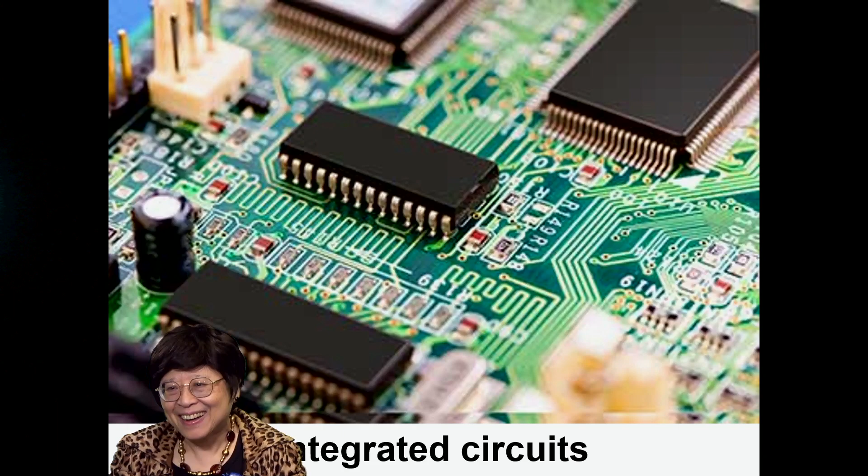Not my plan, and I got interested in integrated circuits. I studied under Professor Carver Mead, the father of integrated circuits. Really cutting-edge education, because back in '72, he was already teaching us how to make and design integrated circuits.

However, I did some research under Professor Pol Duwez, the father of amorphous metals. That's in materials science, and that really got me very excited about research, which is the pushing of the frontier of knowledge. Materials in particular constitute the foundation of any technology, whether electronics, aerospace, and so on. Also, materials mark the history of human civilization: Stone Age, Bronze Age, Iron Age, and so on.

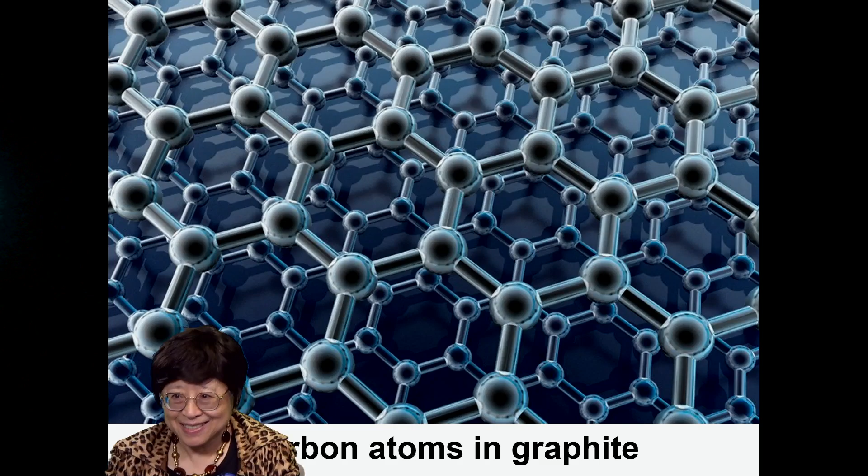After graduation from Caltech, I went on to MIT for my graduate studies, also a very good school. And there I fell in love with graphite, beautiful structure and beautiful physics. I chose to study that under Professor Mildred Dresselhaus, a very prominent carbon scientist.

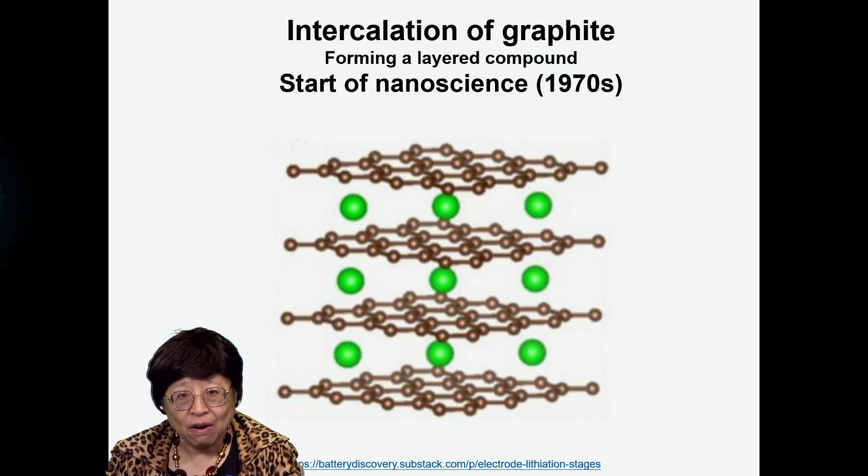She and I studied the intercalation of graphite, that is, converting graphite to a metal. That was actually the start of nanoscience back in the 1970s. I did research in this field for about 15 years. However, I saw my field declining because the applications did not quite work out at the time.

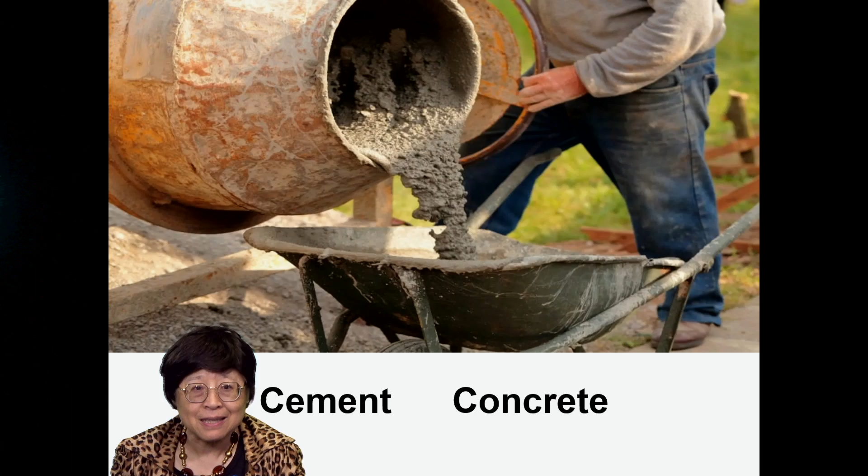I was still very young, so I decided to leave my field of expertise. That forced me to think out of the box and leave my comfort zone. Somehow I got interested in cement or concrete, though I've never mixed it or studied it before.

With my background in electronic properties of materials, I added some short carbon fiber, which is conductive, into concrete, and thus I invented smart concrete. Smart concrete is self-sensing.

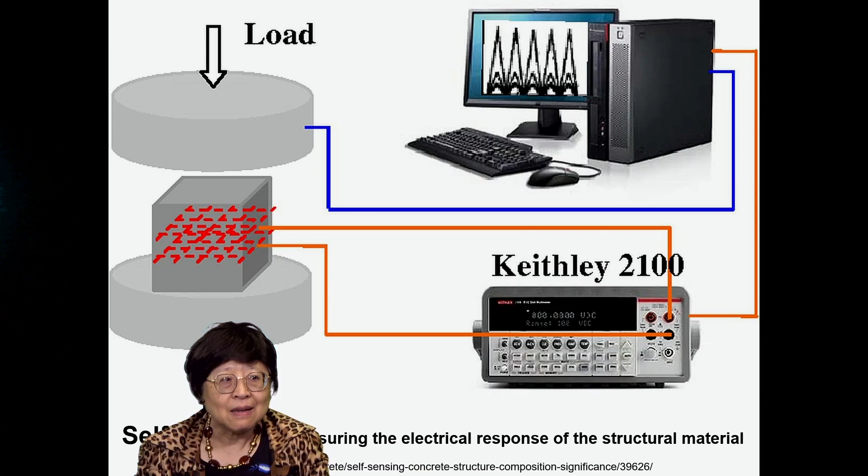That is, it can sense what's going on in itself without any sensor incorporation. One monitors the electrical behavior and how that is affected by the load or the damage. This provides real-time monitoring, which is better than occasional monitoring.

Device incorporation actually was the conventional way of getting a structure be able to sense. But such sensor incorporation or embedment makes it hard to repair. You know, it's all embedded. How can you repair the sensor?

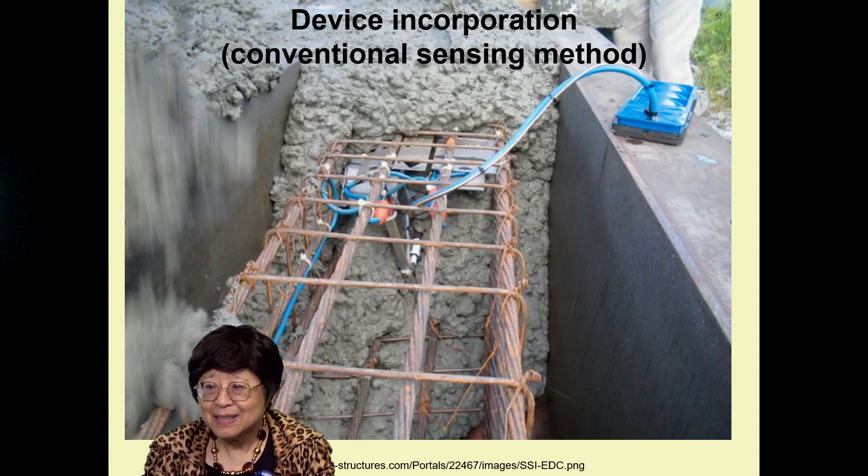Here, with no device incorporation in the concrete, we enjoy the low cost, high durability, large sensing volume, and the mechanical performance not being compromised. If you embed something in the concrete, it's like having a hole in the structure, and the mechanical properties would be degraded. There are numerous applications.

One of them is building intruder detection, not using camera, which is usurping privacy, but it's weight-based sensing to sense the intruder. Another application is weighing the trucks as they move. Also traffic monitoring by, again, weight-based sensing of the vehicles.

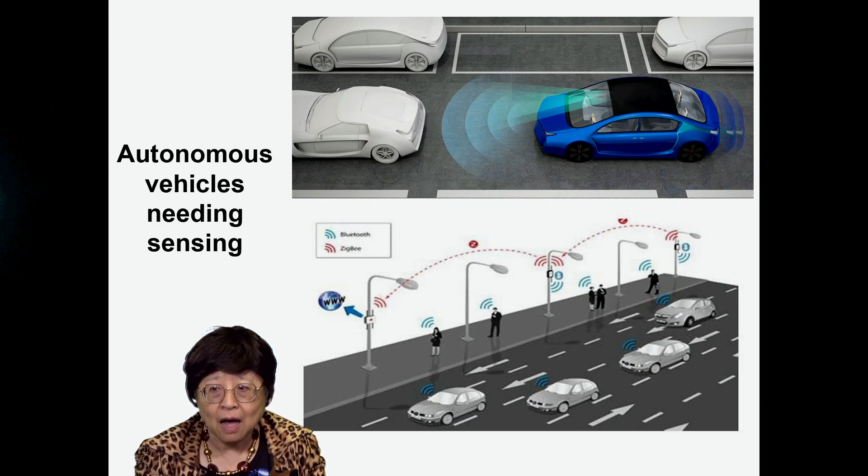And yet another application is for autonomous vehicles or driverless cars. They need a lot of sensing. Yet another application relates to bridges and high-rise buildings which need vibration control. And vibration, again, pertains to loading.

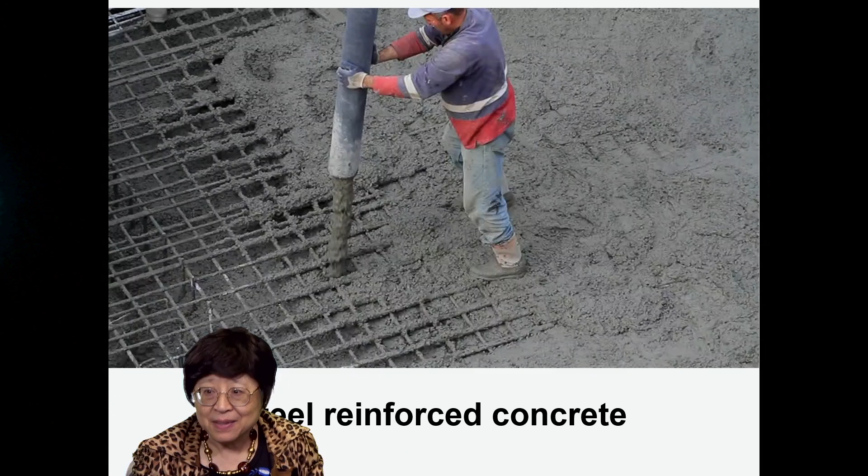Back in 2007, this bridge suddenly collapsed in Minneapolis. And here, 2021, this building in Miami suddenly collapsed. Now, the material involved is steel-reinforced concrete, seemingly a very matured technology. However, there are serious problems.

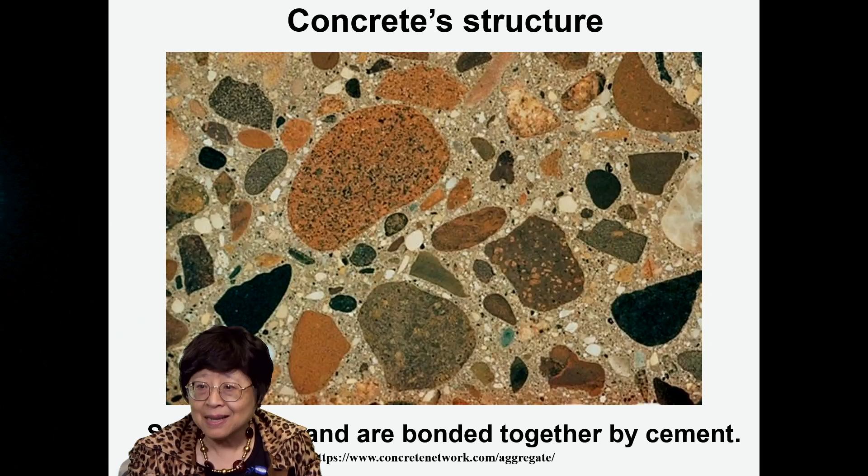That stems from the fact that concrete involves sand and stones that are bonded together by cement, and it is not a very strong bond. And so steel is needed to reinforce the concrete. However, the steel gets corroded.

Again, very impressive technology. Another application has to do with oil gas wells, which need concrete to seal it. If the seal is no good, then oil can leak and cause terrible oil spill.

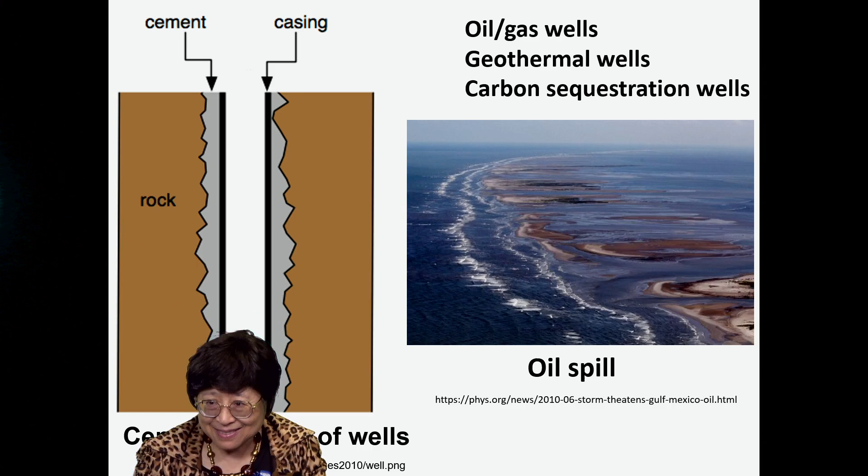Now, in concrete, one big problem is freeze-thaw damage. That is when the concrete freezes below 0 degrees C and thaws above 0 degrees C. Having cycles of this freezing and thawing can cause damage.

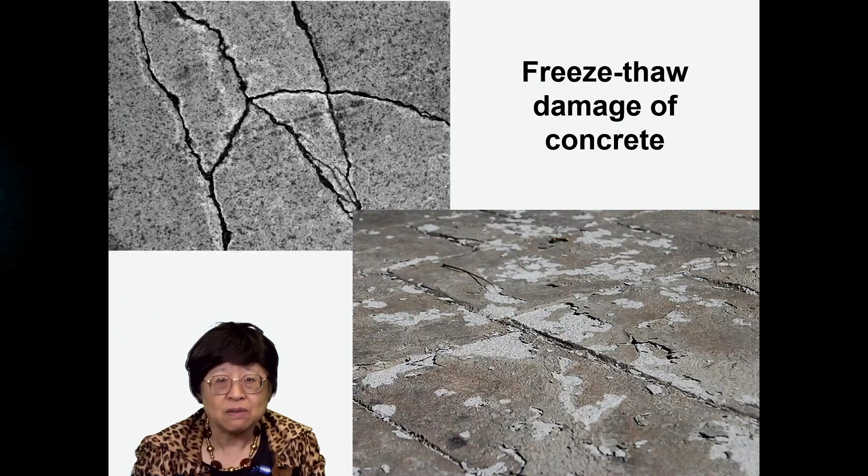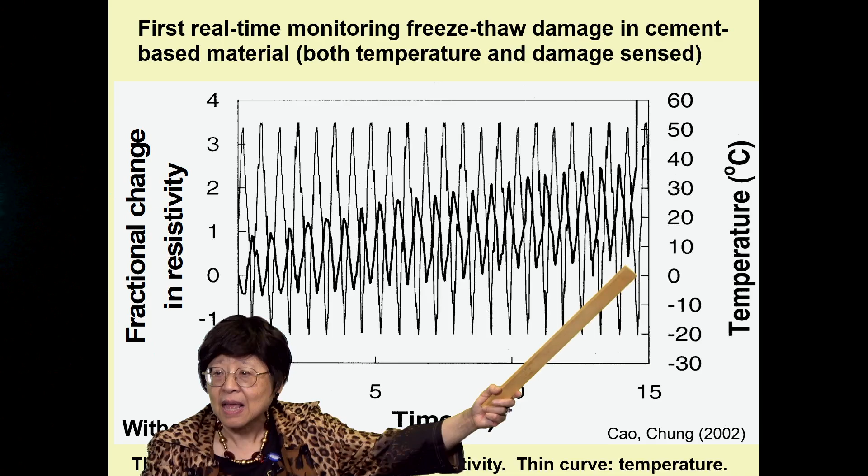By using resistance measurement during the freeze-thaw cycling, we are able to monitor the progress of this damage in real time. Shown in thin line is the temperature, going from below 0 degrees to above 0 degrees over quite a number of cycles, and in thick line is the resistance. The resistance responds to every change in temperature. In addition, the baseline resistance climbs up steadily, cycle by cycle, meaning the damage is incurred cycle by cycle, until it fractures, and that last fracture occurs at the coolest point of the last cycle.

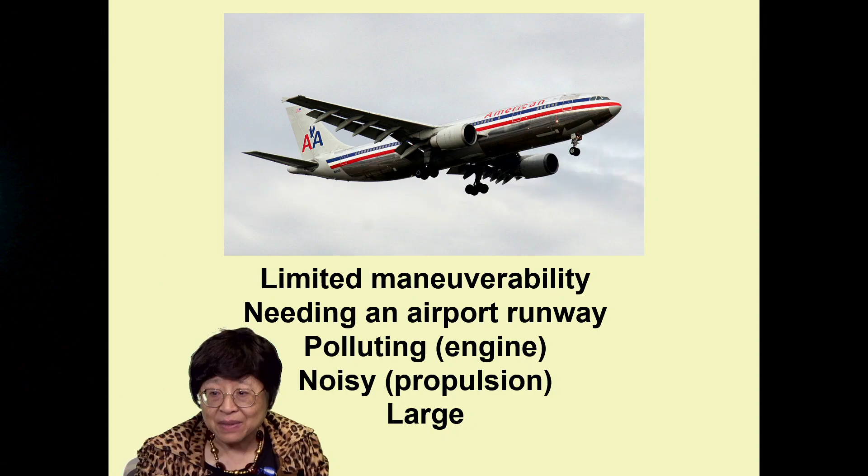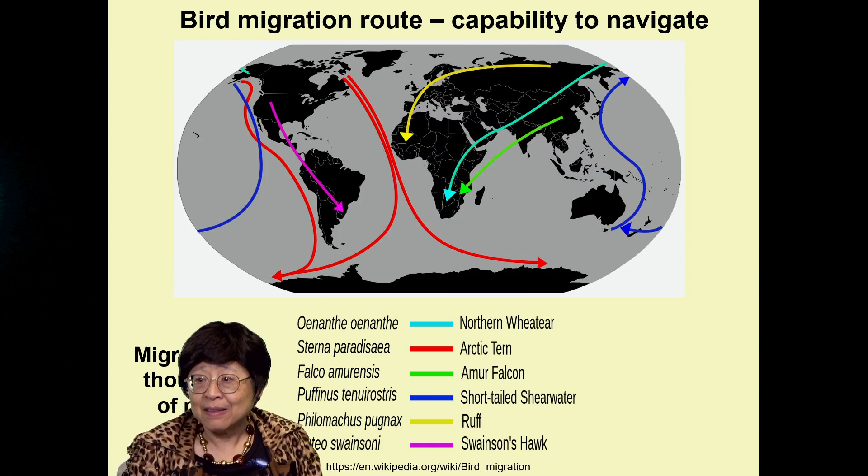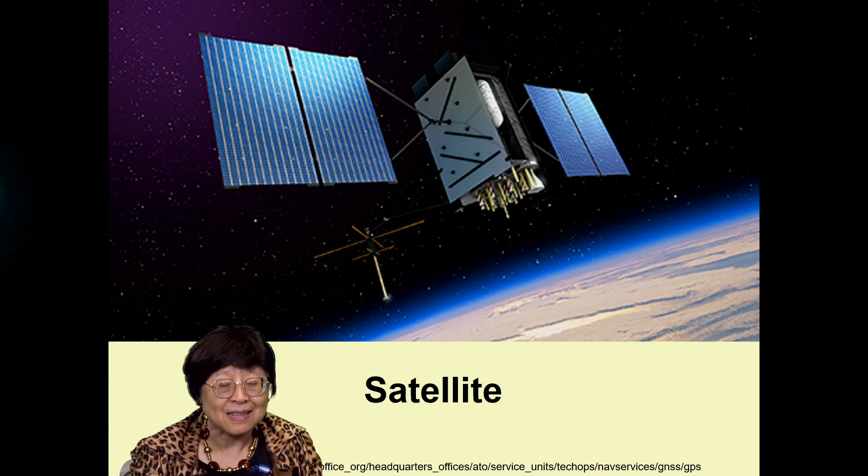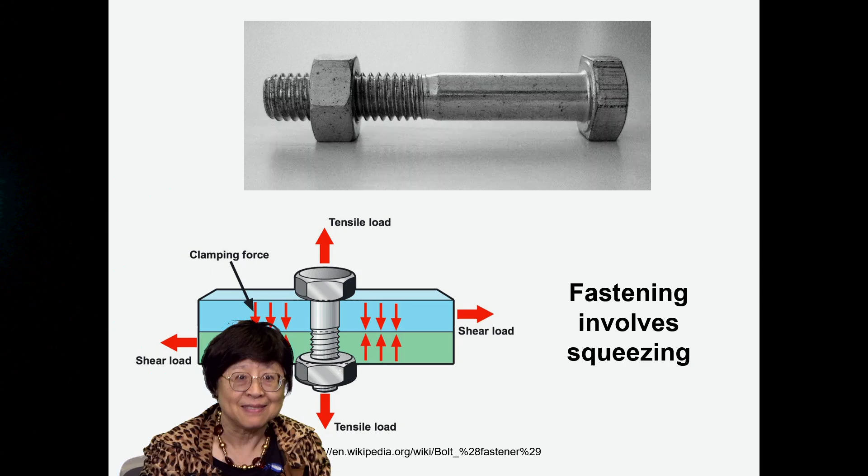And the culprit, now why would that tail come off? It's a fastening problem. Fastening means nuts and bolts. Now, fastening two plates together like this using the nut and bolt. And fastening sounds like an old technology.

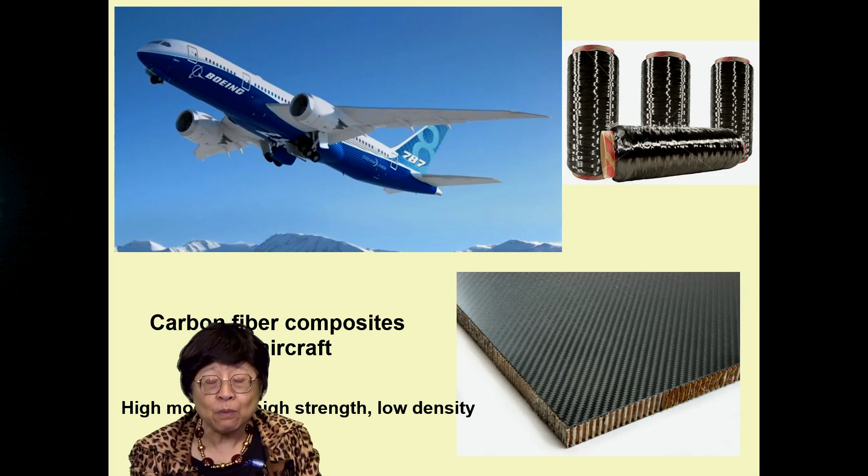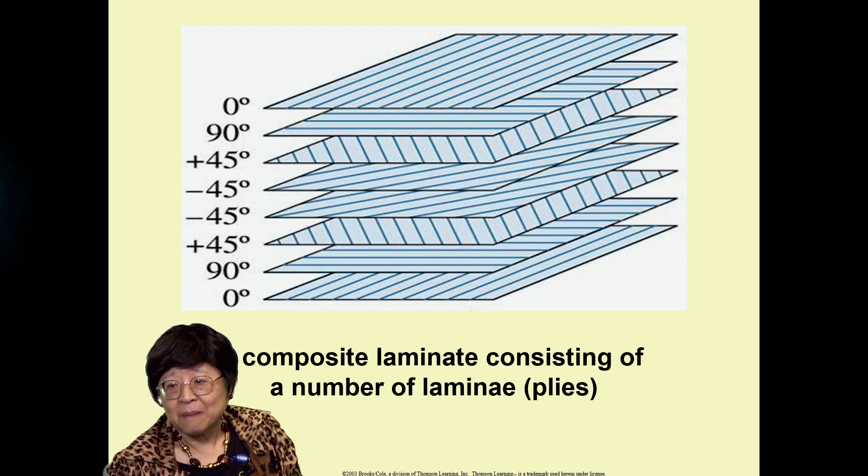Well, it's problematic, particularly in terms of aircraft made with carbon fiber composite. Now, these composites are wonderful in their lightweight, high strength, and high modulus. These composites are in the form of laminates, that is, they're in the form of plies, or called laminae. Within each ply, the fibers are in a certain orientation, and in different plies, they are in different orientations. Between the plies, that interface is the mechanical weak link. And so in fastening, you are squeezing along the weakness direction, squeezing in a direction perpendicular to this interlaminar interface, the interface between the two plies. No wonder there's a problem.

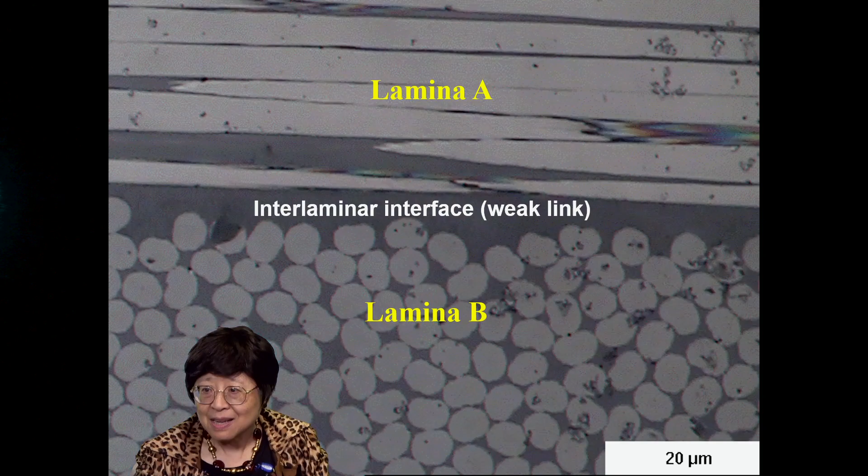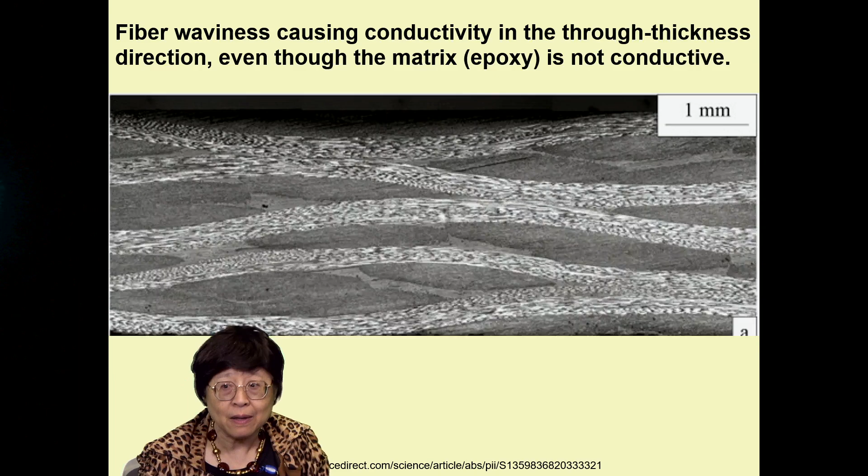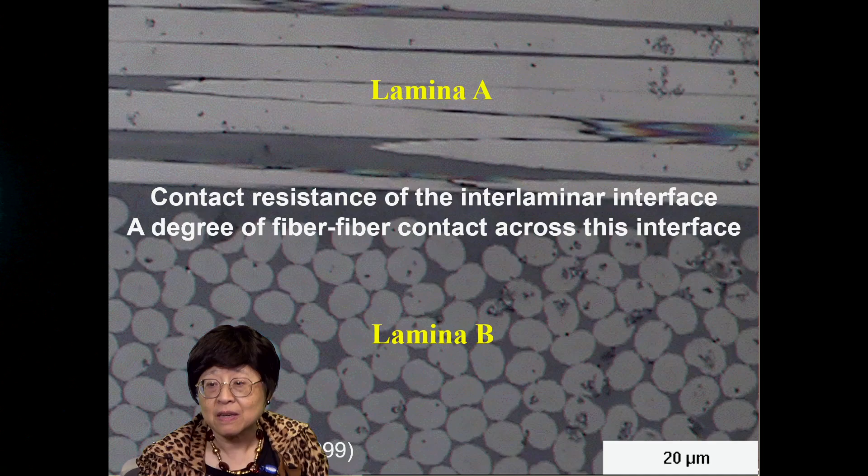Fiber waviness tends to occur in all these carbon fiber composites. You see the waviness, and the waviness causes conductivity in the vertical or through-thickness direction, even though the matrix, such as epoxy, is not conductive. And therefore, the resistance in the vertical direction is never infinity. This contact resistance between the adjacent laminae reflects the integrity of that interface, and it's never infinity because there's a degree of fiber-fiber contact across this interface.

So we measured this contact resistance during the squeezing, over a number of cycles of squeezing at different maximum loads. We find that every time we squeeze, the contact resistance decreases, because the chance of fiber-fiber contact across that interface is increased. But very interestingly, the resistance doesn't go all the way back. You squeeze and unload, it doesn't go all the way back.

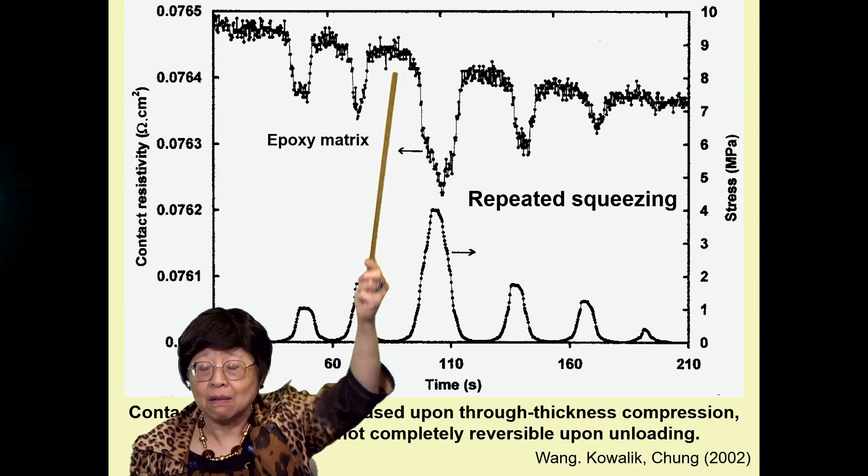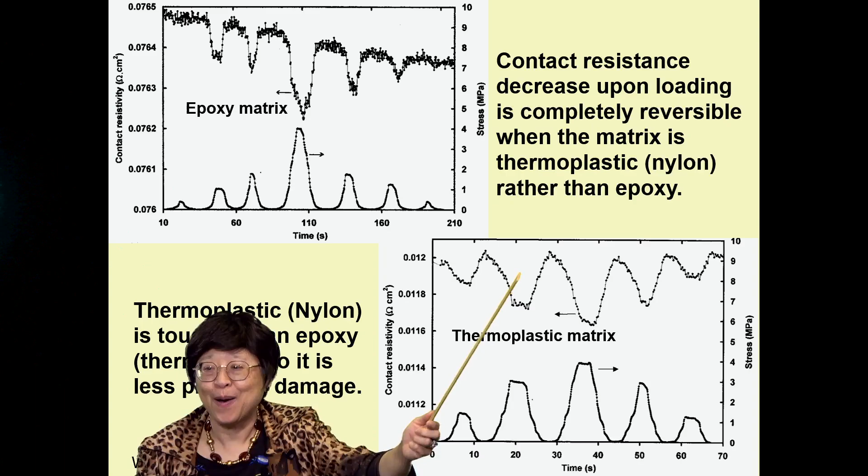However, if you don't use the epoxy matrix, but use a thermoplastic, such as a nylon matrix, it goes all the way back upon unloading. That is because the thermoplastic or nylon matrix is tougher than the epoxy matrix, so it's less prone to damage. So it'd be better off if one uses the thermoplastic matrix in place of the epoxy matrix, but epoxy is still the matrix that's used for aircraft structures.

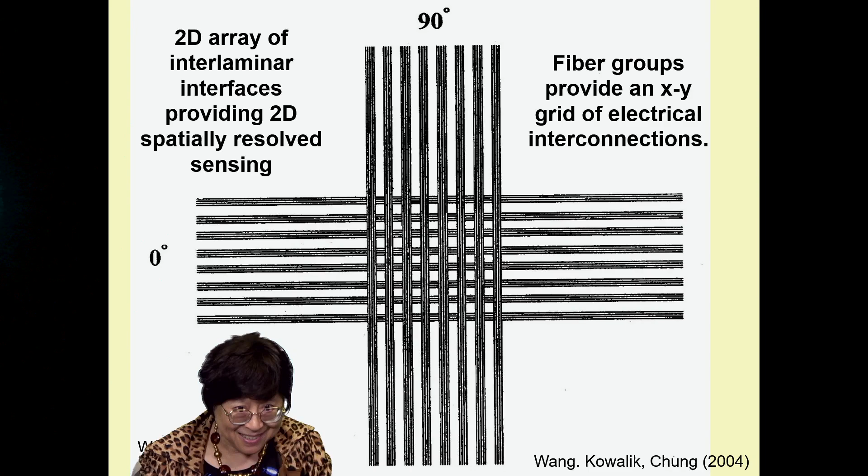Another nice thing about using the carbon fiber composites to sense itself, without device incorporation, is that you have a 2D array of these interfaces. So you have a 2D array of sensors, thus allowing spatially resolved sensing. In addition, you have this XY grid of electrical interconnections provided by these fiber groups. So you have sensors as well as electrical interconnections all built into the structural composite.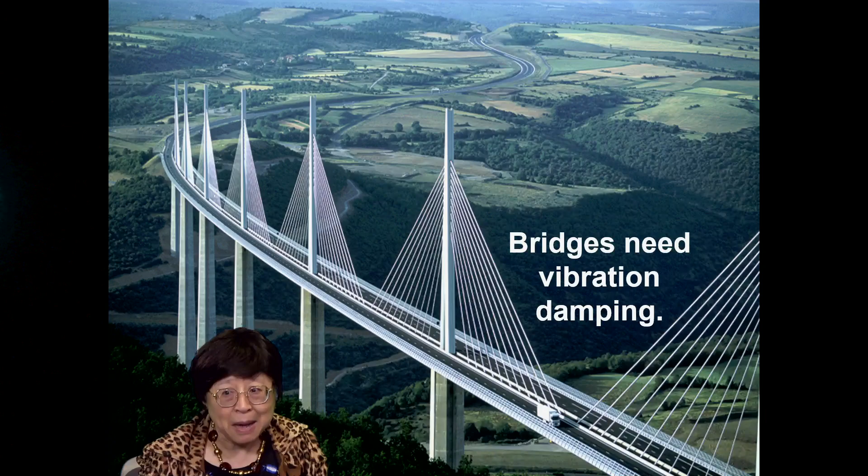Next, I'd like to move on to my second topic, which is vibration damping. Bridges need vibration damping. High-rise buildings need damping.

Railroads need both damping and sound absorption. A sound wave is a pressure wave, so it's also a mechanical wave. Aircraft also needs noise reduction, and satellites need vibration damping.

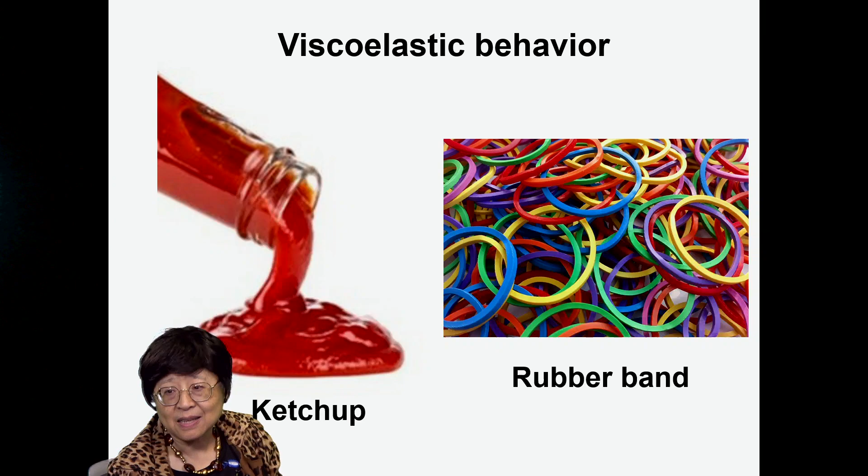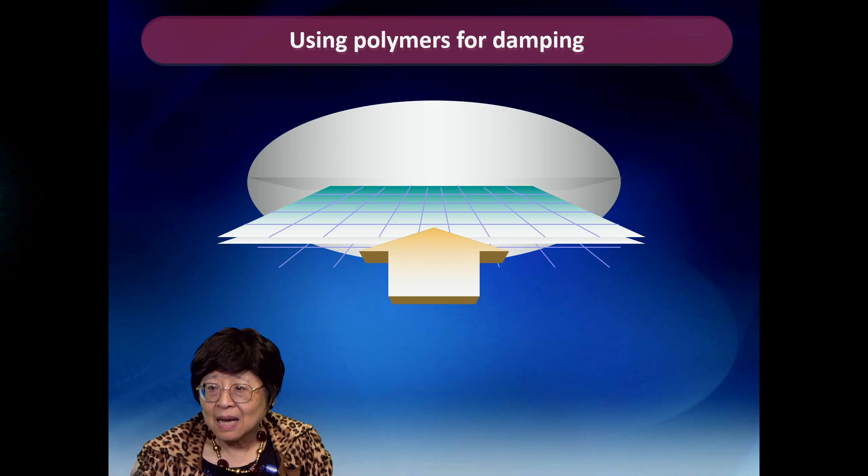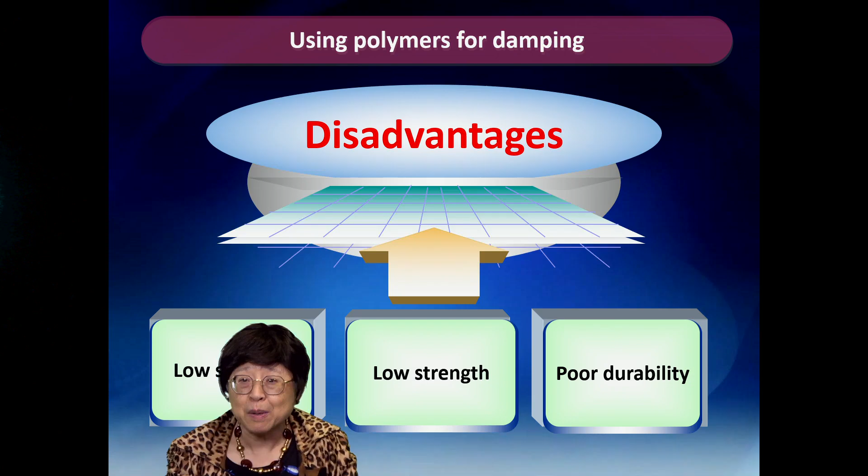Using polymers like rubber for damping is very common, but there are serious disadvantages because polymers have low stiffness, low strength, and also poor durability. Our rubber band becomes brittle after a while.

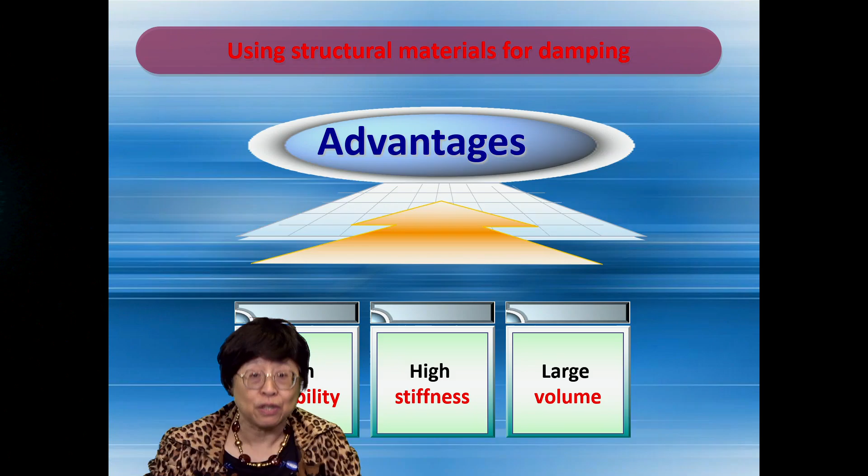However, using structural materials for damping, something I dreamed of, has quite a lot of advantages. They have high durability, high stiffness, also large volume - this is a structure, so large volume. And this hysteretic area actually is the energy dissipated per unit volume, so having a big volume really helps.

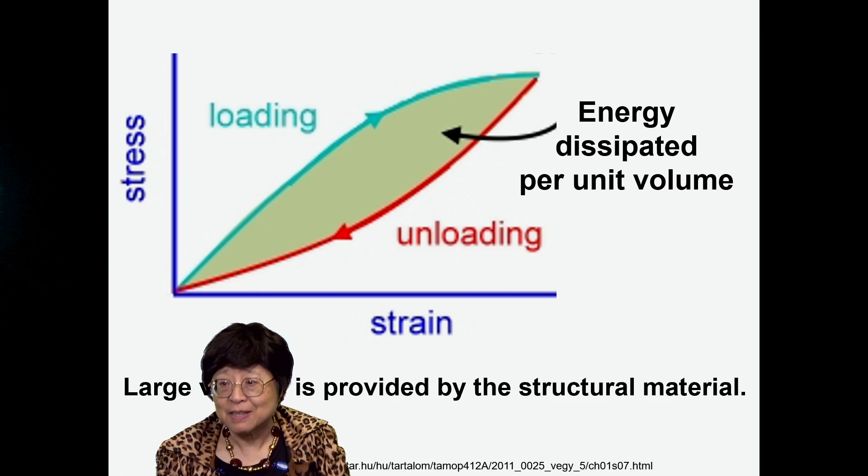But I have to come up with an alternate mechanism for providing that damping. I realized that slight slippage at the filler-matrix interface, such as this particle reinforcement and the matrix, that interface - very slight slippage at that interface consumes mechanical energy. And if you have a large interface area, it can amount to quite a bit of mechanical energy dissipation.

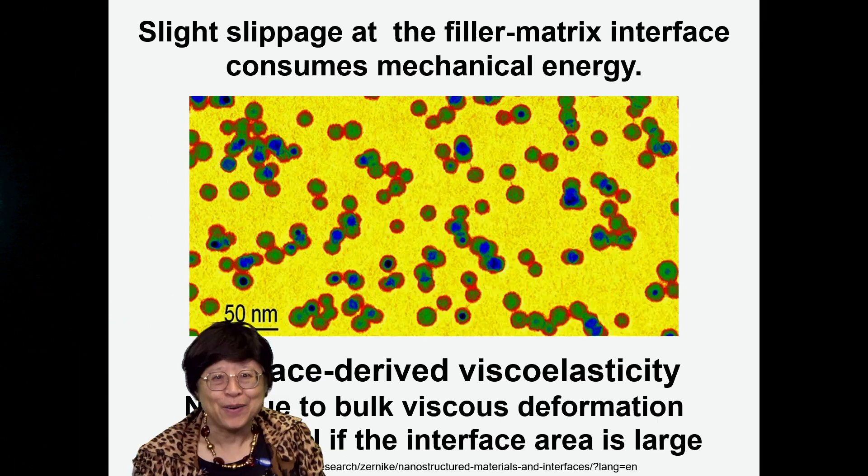This new mechanism is called interface-derived viscoelasticity - I just coined that name myself. Back in 1998, we provided the first report of interface-derived viscoelasticity.

In this first example, we used a cement matrix and then put some silica nanoparticles into it. Because this particle size is so small, you have a lot of interface area, and therefore it becomes more able to dampen. At the same time, these particles are reinforcement, and they strengthen the material. So we have a situation where adding these particles improves the stiffness and the viscoelastic character at the same time.

And that was like magic at the time. People couldn't believe me, but now they do.

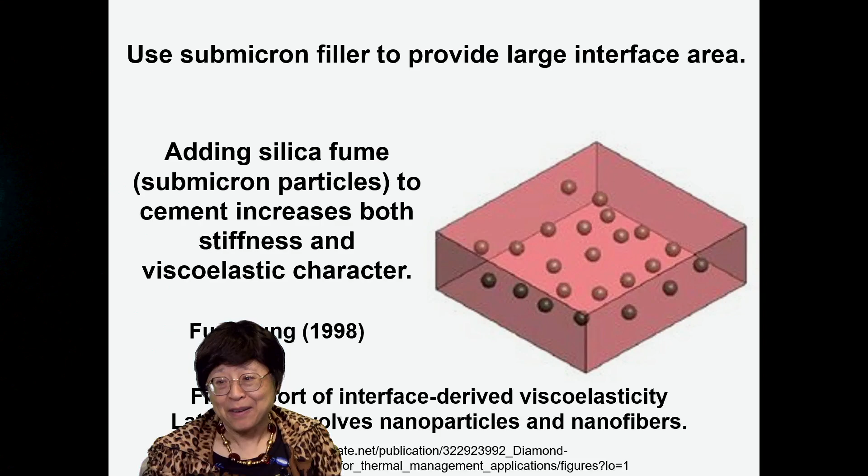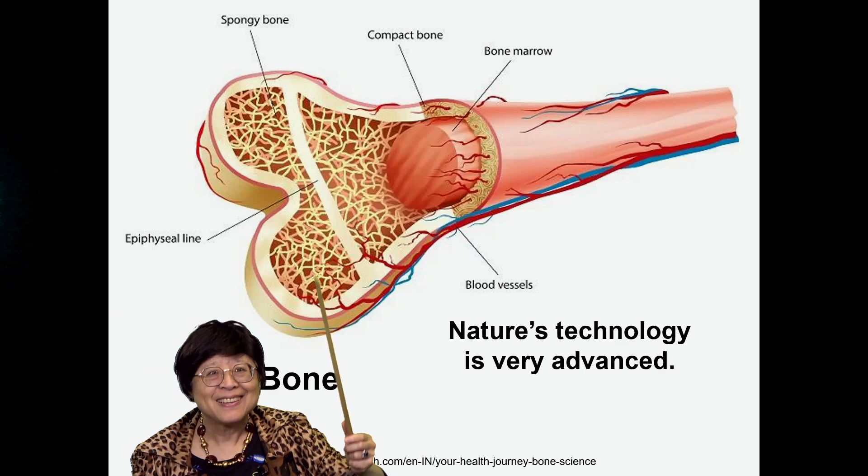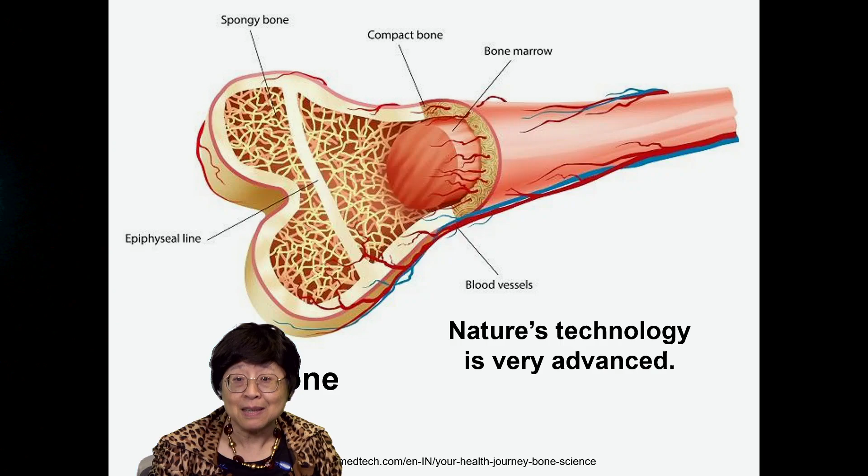Again, I like to look at nature, in terms of bones, like bones in our body. The bone has a compact part - that's the boundary - and then in the interior there's a spongy part, with a lot of interfaces involved. This is a kind of complex design, but nature is really advanced. And the bone is amazingly strong, but it doesn't break so easily.

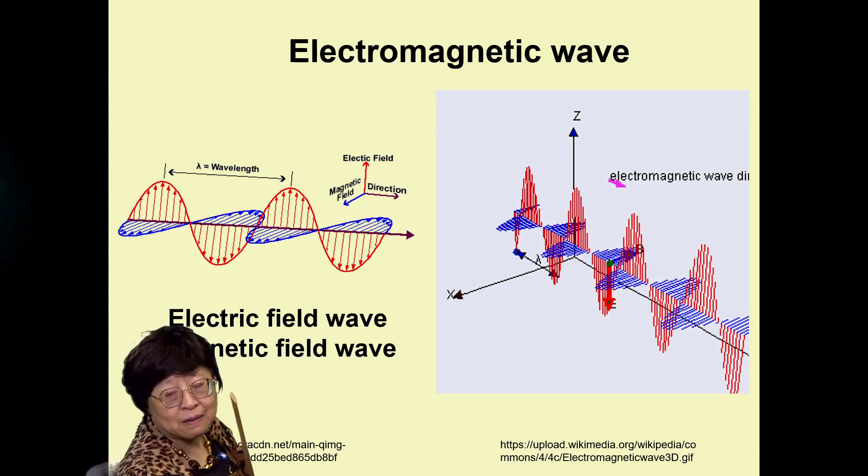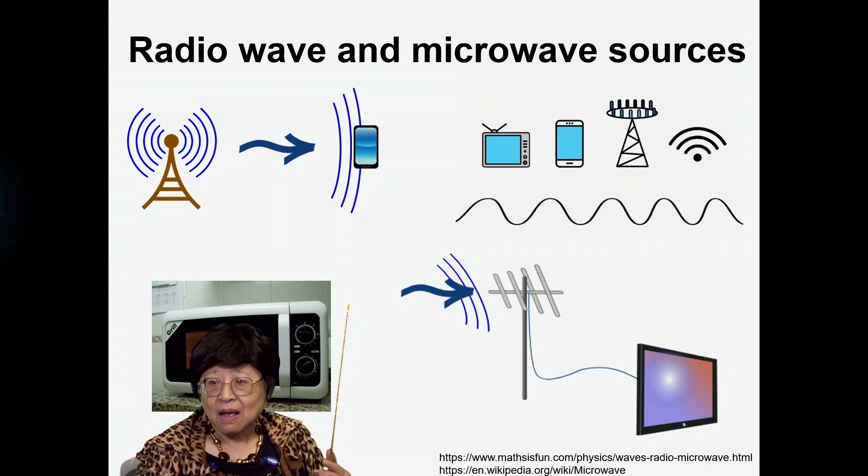Now I move on to my third topic, which has to do with electromagnetic waves. These waves include the electric field wave and magnetic field wave, both propagating together. There are lots of radio wave and microwave sources all around us - the microwave oven, the cell phones, the TVs, the lamps, the Wi-Fi, all over the place.

This interaction between the radiation and the material involves reflection off the surface, as well as absorption as the wave goes and travels inside the material.

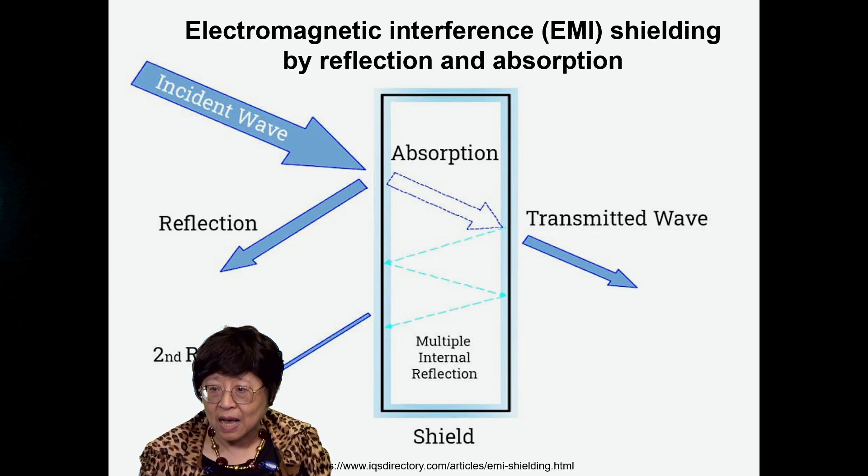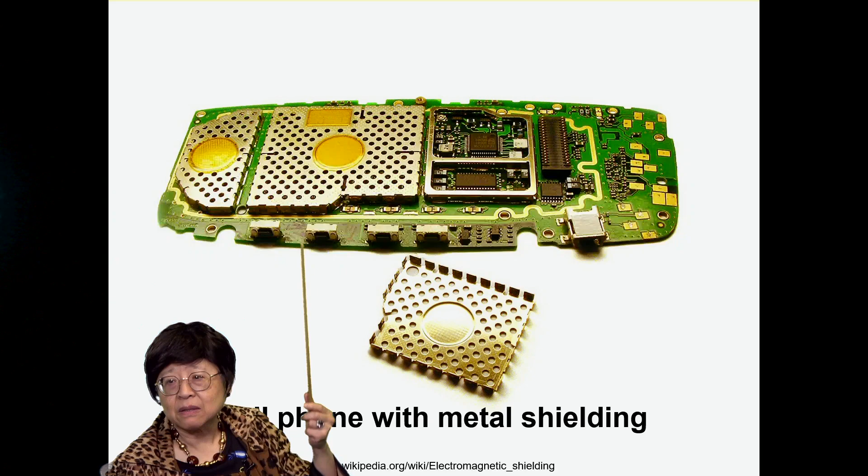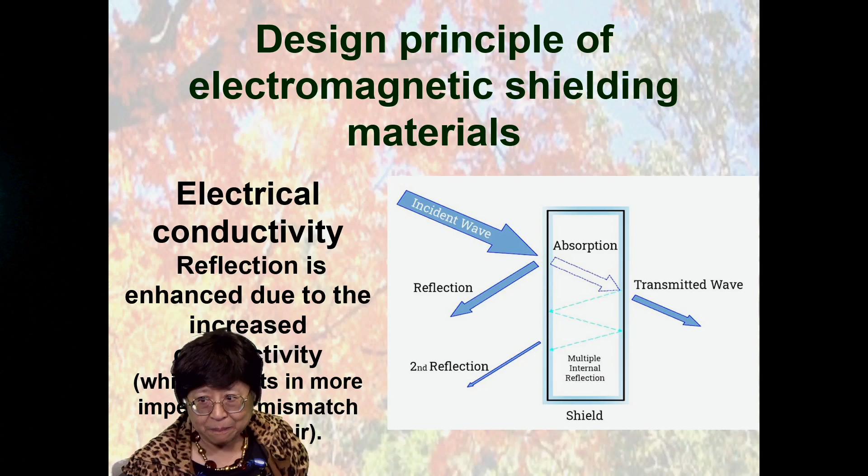The design principle of electromagnetic shielding materials has long been electrical conductivity, wanting that to be as high as possible, because reflection is enhanced due to increased conductivity. Therefore, with metals being very conductive, metal mesh is widely used for the microwave oven door as well as for a room housing electronics.

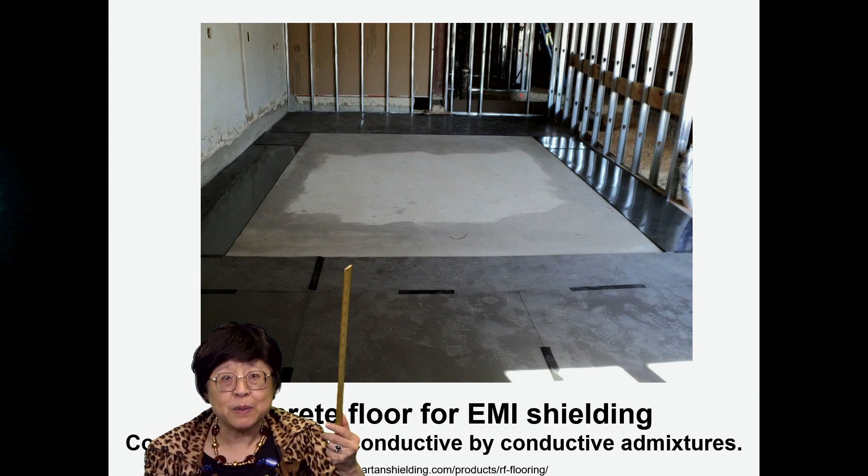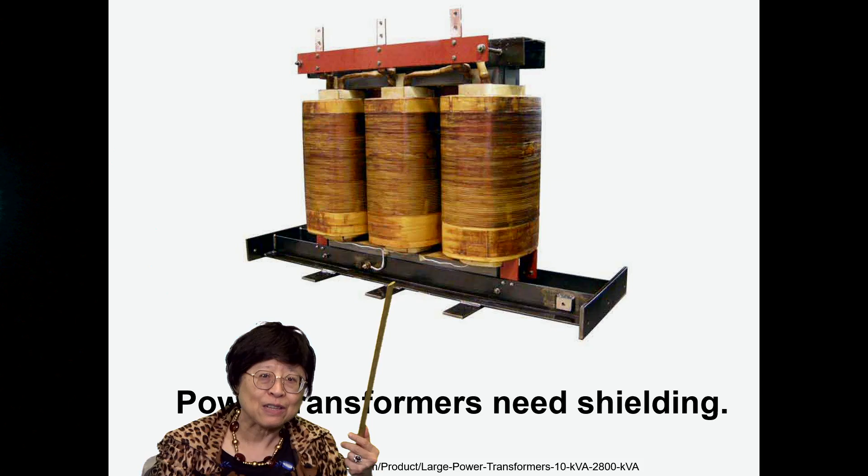Even concrete floor can be rendered conductive by the use of conductive additives, for the purpose of shielding certain parts of a building or other structures. For example, transformers are used all over the place to provide electric power for our homes and the city. And the transformers need shielding.

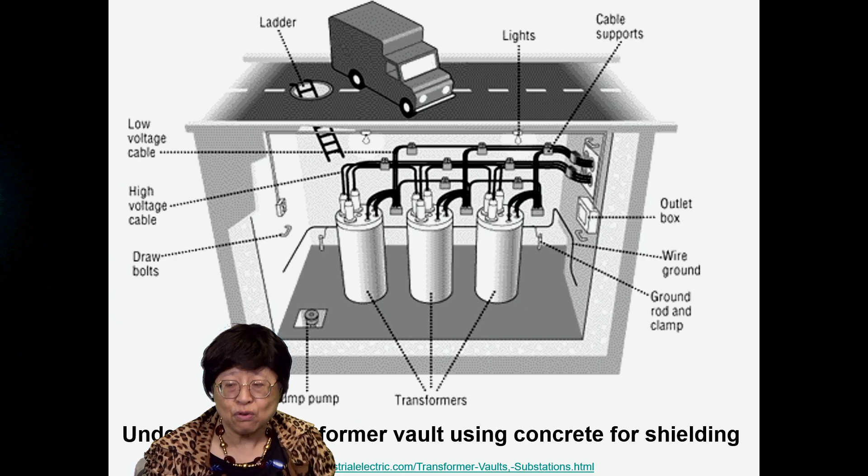Here you see the transformers underground in a vault - a concrete vault - and you see the car and the road on top. This vault needs concrete that's able to shield so as to protect the transformers. And this is inside the vault.

Also, rich people in particular want luxury bunkers to provide shielding to protect their family. Another application has to do with automatic highway.

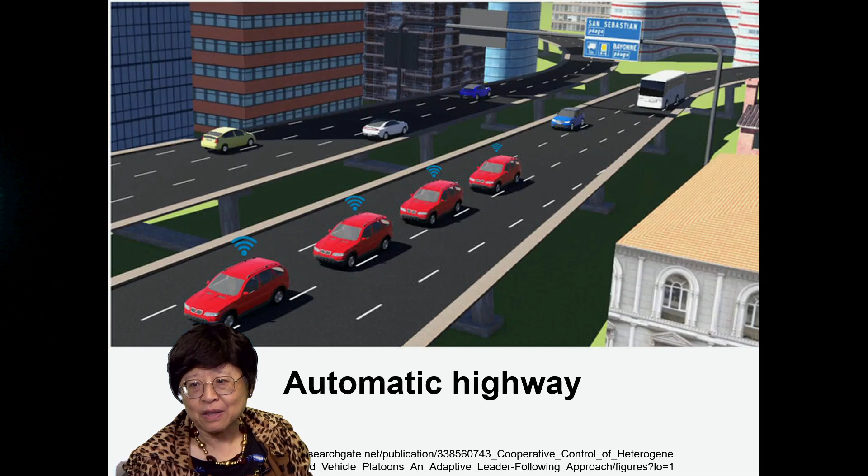Automatic highway needs lateral guidance of the automobile, meaning automatic steering. One can provide that by having within each lane of the highway, say the middle portion or the edge regions, radio wave reflecting concrete. The car has inside both a transmitter and a receiver of the radio wave, so when the car sways to the edge, it would know it.

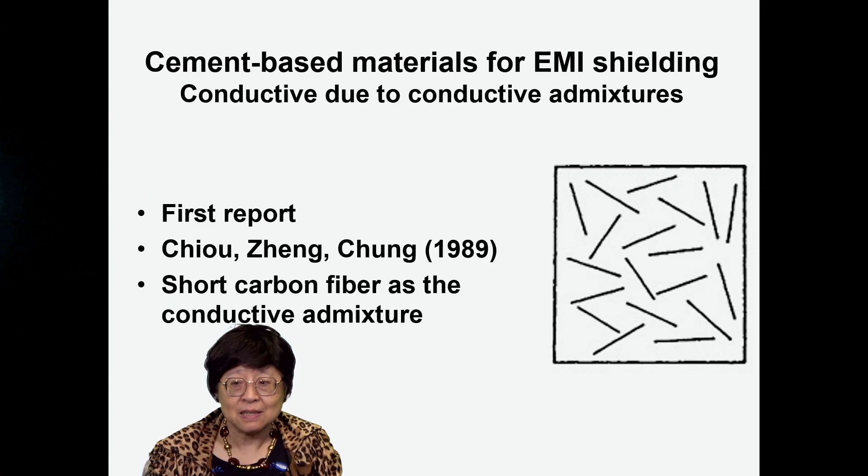Cement-based materials for shielding are conductive due to conductive admixtures, the additives thrown into the concrete mix. My students and I provided the first report of that back in 1989, and we put in short carbon fiber as the conductive admixture. After that, the technology has become better and better.

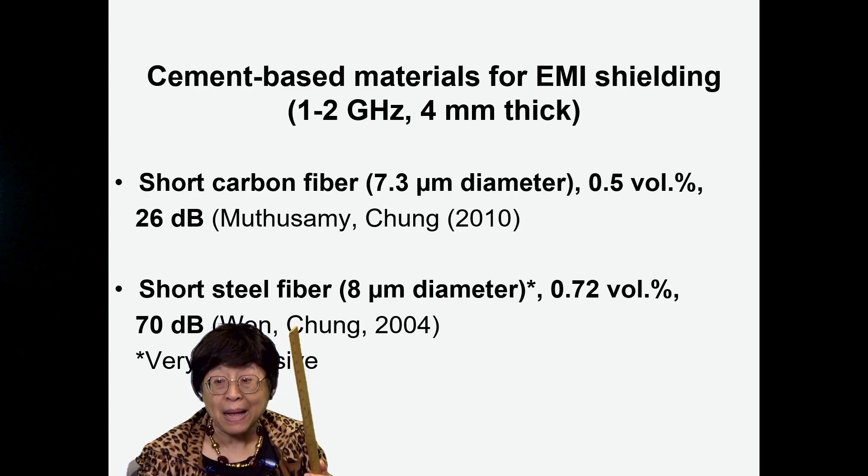With the short carbon fiber, 7 micron diameter, we got 26 dB of shielding. With short steel fiber, 8 micron diameter, we get 70 dB, even higher. So steel fiber is even more effective than carbon fiber, but this micron diameter steel fiber is extremely expensive.

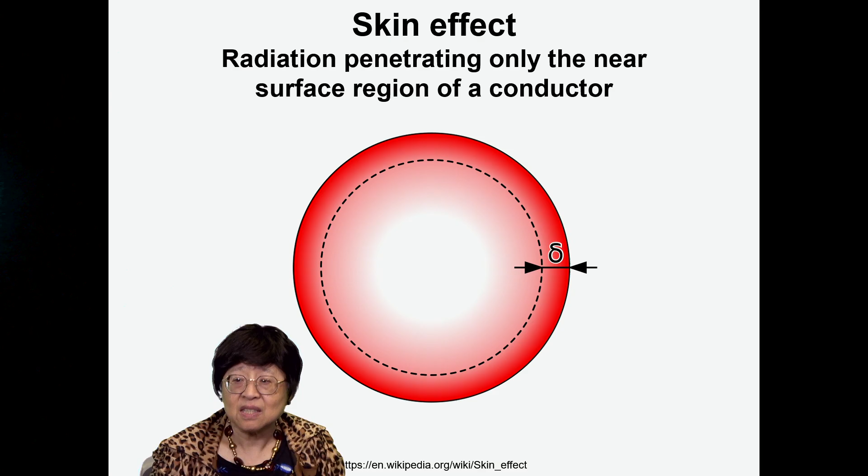Why are these tiny diameters so important? Well, it's because of the skin effect, which pertains to the radiation penetrating only near the surface of the conductor. Only the surface region sees the radiation. So if you have a non-conductive matrix with conductive filler, whether particles or fibers, the radiation can only penetrate the near-surface region of each unit of the filler, and the inside region is sitting there doing nothing. So it'd be better off if each filler unit is very small in size.

The design principles of shielding materials have always long been one thing, which is high electrical conductivity. But I put forth a second principle, namely we want a high surface or interface area due to the skin effect. And that caused a paradigm shift in the design of these materials. And we want to push this even further.

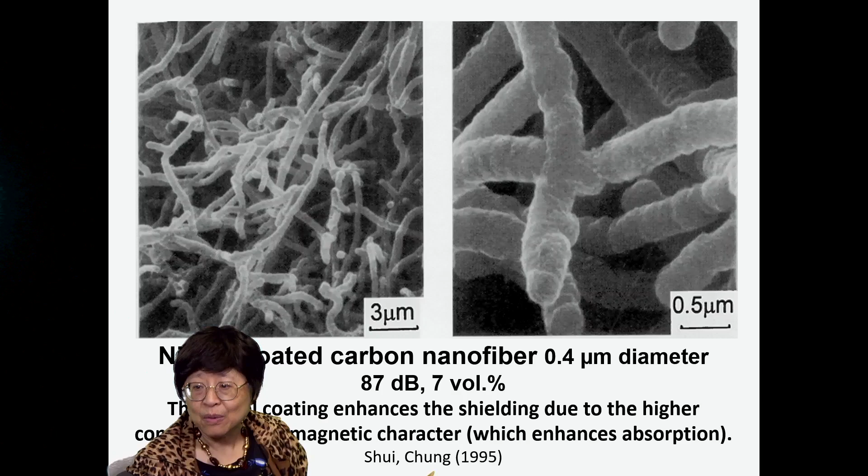This is that same carbon nanofiber shown at lower and higher magnification. To push this further, we coated this carbon nanofiber with a thin layer of nickel. Nickel is a metal, so it's even more conductive than carbon. Also, it's magnetic, and both conductivity and magnetic character help the shielding. This nickel-coated carbon nanofiber provides 87 dB, and it is even now the record. It's among the very best filler materials for making composites for shielding, and that was back in 1995.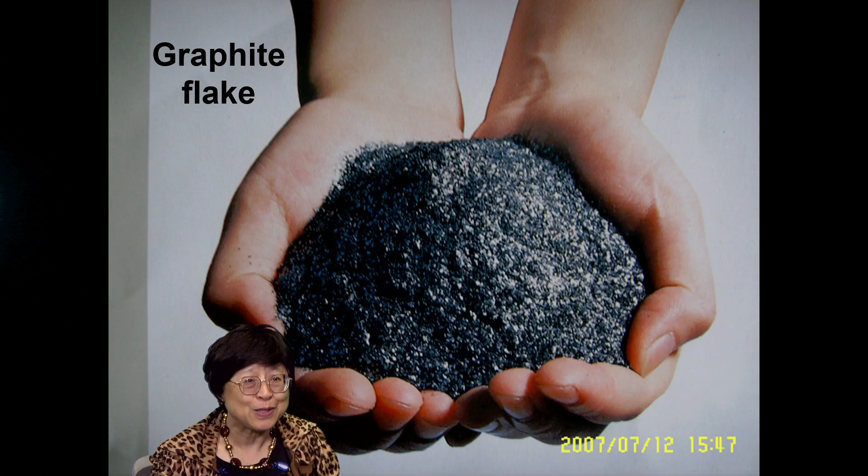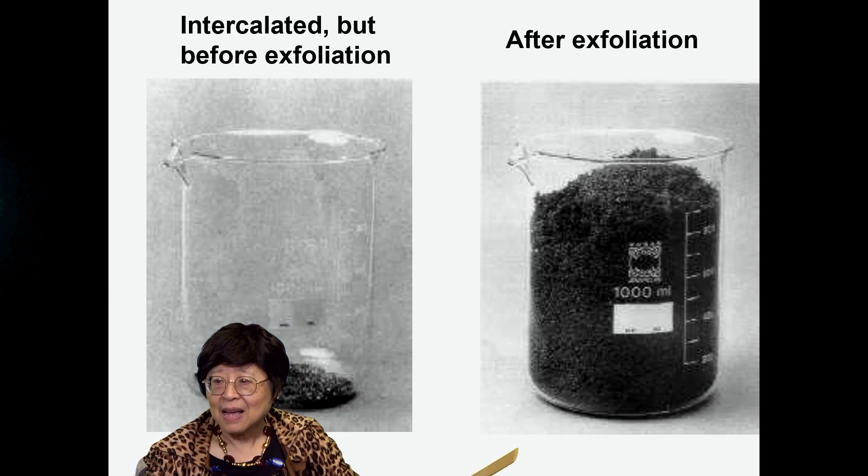To push this even further, we went to yet another route to maximize the surface area while having the conductivity. We used graphite flake, and we intercalate the graphite flakes and then rapidly heat that, and that caused puffing up, exfoliation. This exfoliated material, which we call worm because it looks like a worm, this one piece of worm is derived from one flake. You see there's a cellular structure, and this is actually the mother of graphene.

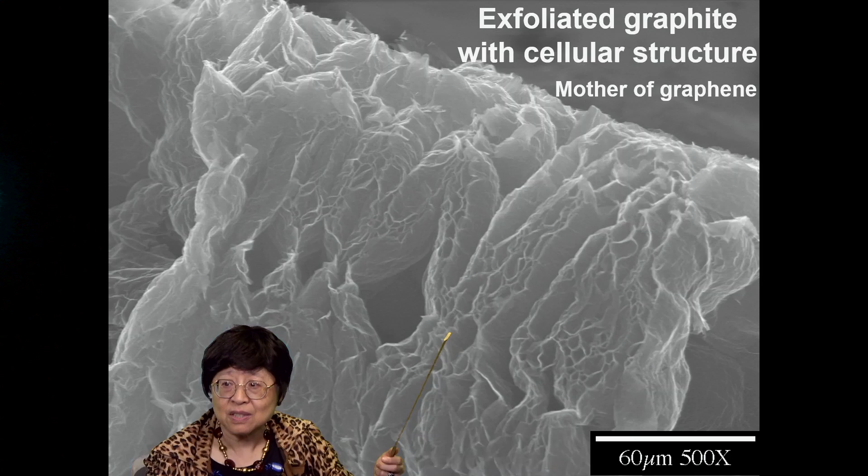You can shake this loose to make graphene. And you can have a pile of these worms and then compress them. It forms a sheet called flexible graphite, and there's no binder involved, just mechanical interlocking between the worms due to the fact that each worm has a cellular structure. By using this material, we attained 129 dB, high surface area as well as electrical conductivity, and this is today still the record. This was back in 1996.

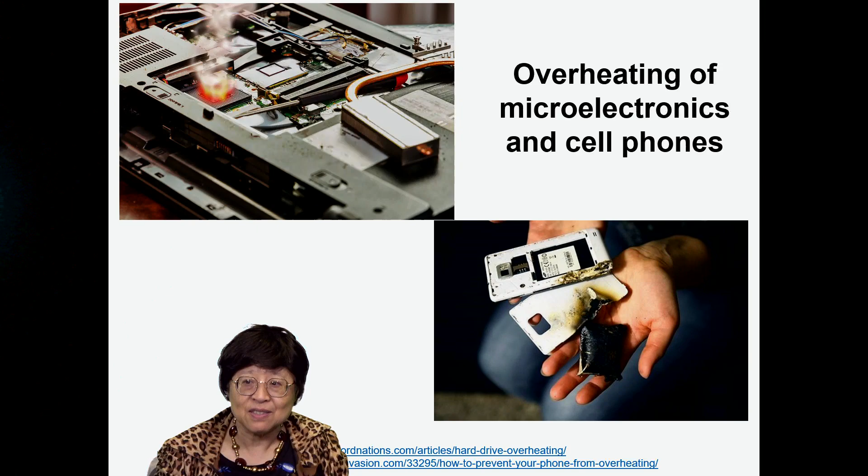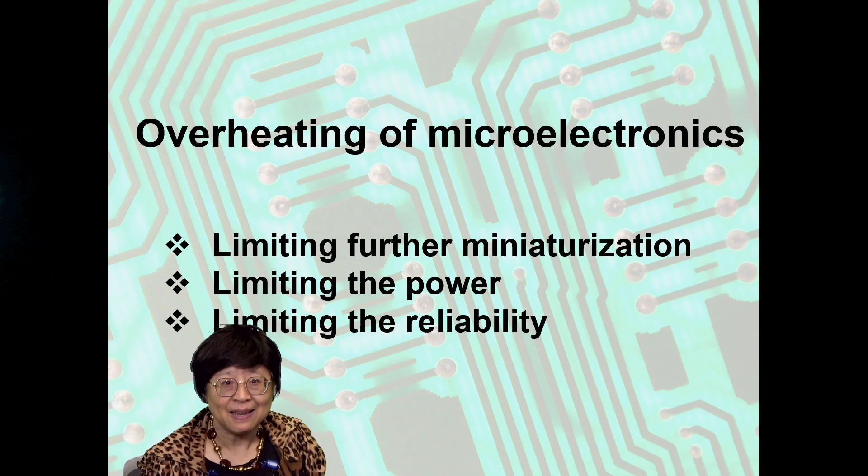Now I'd like to move on to my fourth topic, which is the overheating of microelectronics and cell phones. Big, big problem. This overheating limits the further miniaturization, limits the power, and limits the reliability. Say you have a microprocessor, which is the heat source, and you have a heat sink. The interface between the two is the thermal contact, and this thermal contact needs to be good. Otherwise, heat cannot go from the heat source to the heat sink.

People put at the interface a layer of material called a thermal interface material for improving that thermal contact. The design principle for such materials has long been one thing, which is high thermal conductivity. However, I realized that there can be air voids at the interface resulting from inadequate conformability of this interface material. You have roughness at the interface, at the surface, right?

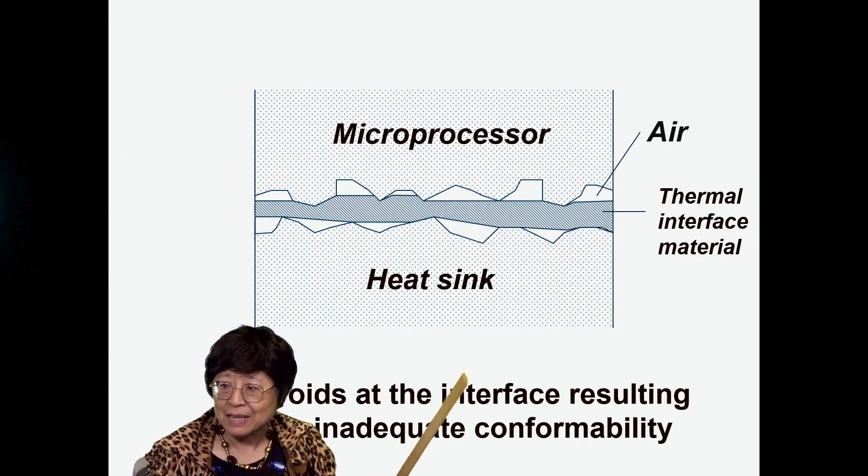No surface is ever perfectly smooth, so you have ups and downs. And this interface material, if it's not conformable enough, it cannot fill all these valleys, and so voids remain, and air is a thermal insulator. This is really a problem.

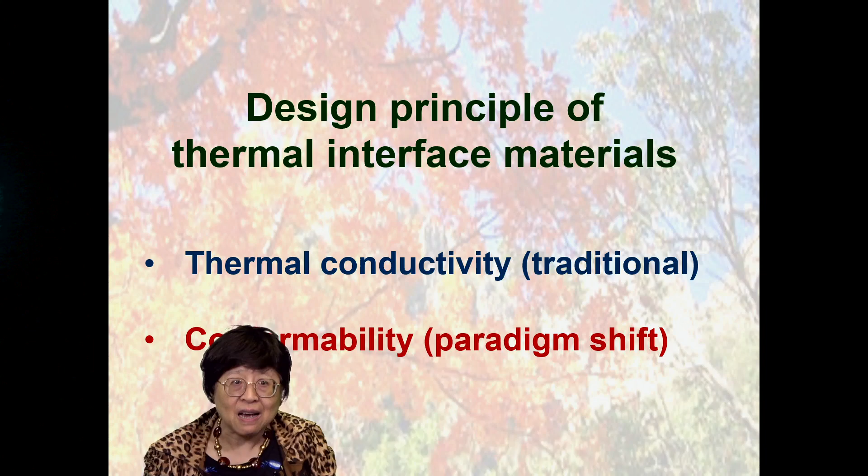Even if the interface material is very conductive, if it is not conformable enough, it's really not effective at all. So I came up with a new design principle, a second one, namely conformability, thereby shifting the paradigm of the design of thermal interface materials.

Now, thermal paste is the most common form of thermal interface material. It's got a solid component and a liquid component. I want both the solid and liquid components to be conformable.

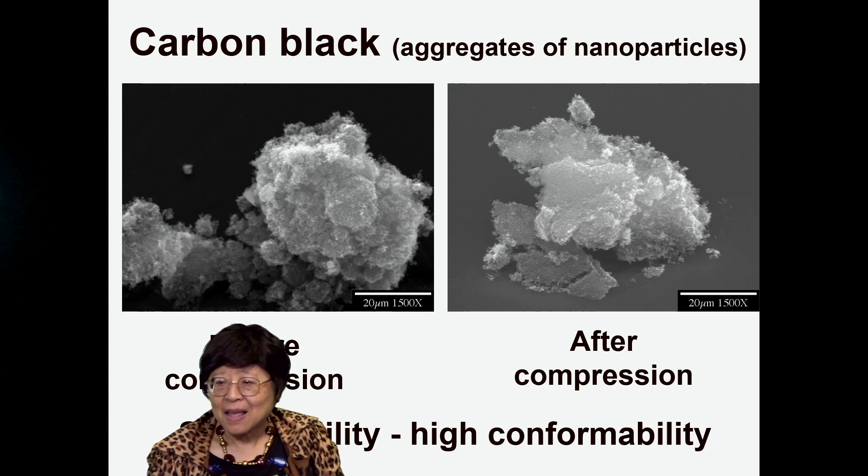I realized that carbon black is in the form of aggregates of nanoparticles. This is before compression, this is after compression. Just a little bit of compression, even with your finger, it would conform. And this is squishable. It's squishable.

So I invented carbon black thermal paste, which excels due to its conformability, with both the solid and liquid parts being conformable. This is work back in 2003.

So I pioneered these four research topics: structural self-sensing, vibration damping through interface-derived viscoelasticity, electromagnetic interference or EMI shielding materials, and thermal interface materials. The disciplines involved in my research involve material science and engineering, mechanical engineering, thermal engineering, electrical engineering, civil engineering, physics, and chemistry.

I study broadly without fear. I make sure that I firmly grasp the basic scientific concepts. I study by myself. I continuously study all these decades. I want to make sure that I understand the technological needs. I want to continuously contribute to my profession in a sustained fashion over many years.

Also, I don't want just an incremental advance in technology. I want a transformative advance. And I want to think out of the box, jumping out of my comfort zone.

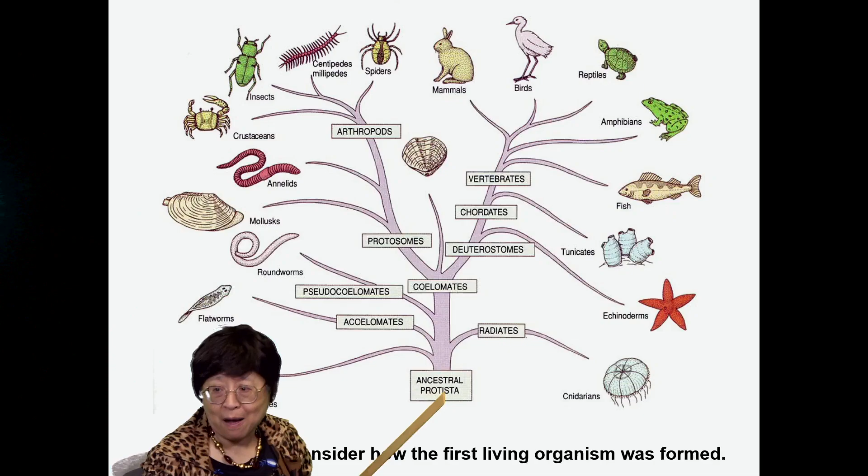IQ, intelligence quotient, is important. EQ, emotional quotient, refers to the ability to persevere in face of difficulties. SQ, spiritual quotient, refers to having understanding of the meaning of life. All three Qs are important.

The word vocation has a Latin root, vocare, meaning a voice, a call. Who's calling? God. God is calling us to a certain vocation, a certain life path. And we should have a purpose in life that matches God's perfect plan for us.

We must get connected with God. God wants to have a personal relationship with all of us. It's wonderful to be a child of God. God can give you strength beyond your imagination. A life that is according to God's will is the most beautiful life.

And I wish you all a most beautiful life ahead of you. God bless.